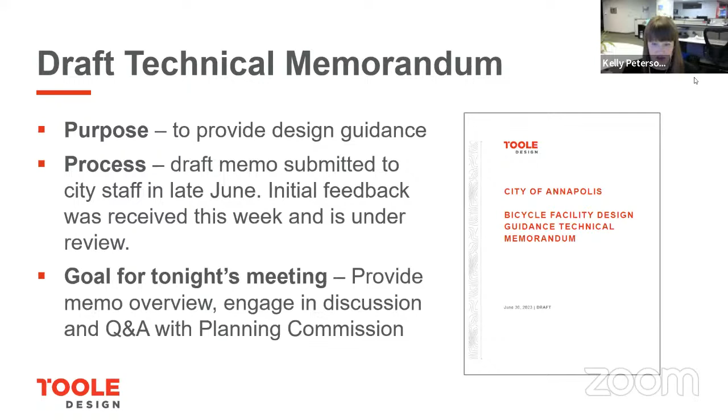So just a quick background on Toole Design. Our firm is a team of planners, engineers, and landscape architects focused on designing and building spaces where people can move freely and be a part of their community, not just move through it.

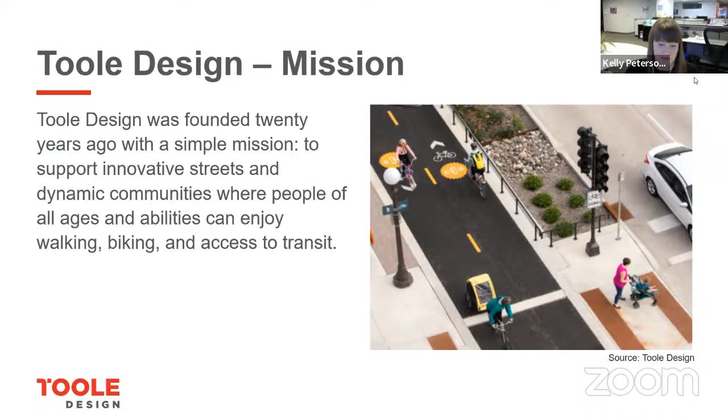Can I ask just a quick question on that? Sure. Is there a reason you don't reference any of the NACTO stuff? We have referenced it in the memo. We haven't worked directly on that, as far as I know. Okay, so you have worked—so these are things you've worked on directly, Toole Design worked on. Yeah, so these aren't. I'll get to the list of resources and references that we pulled from.

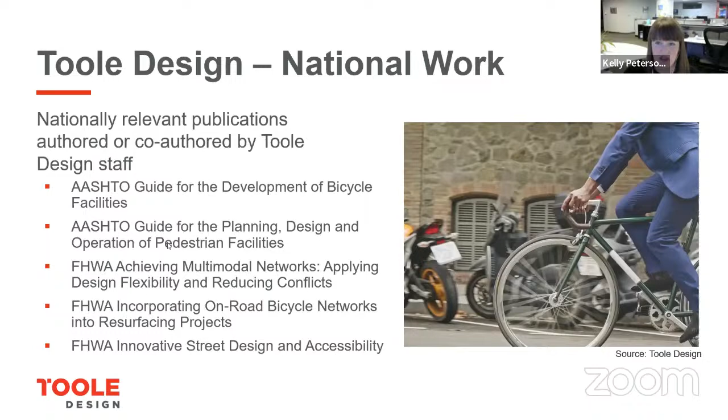But this is just an example of the national level of work that Toole Design is doing with pedestrian and bike planning. And then our work regionally, we've done a lot. These are just a couple example projects. Most recently, we've worked with the county on Walk and Roll Anne Arundel, which recommended 23 miles of separated bike lanes, 100 miles of new bike lanes throughout the county, and 200 miles of shared use paths. That project just wrapped up earlier this year, and it also made significant recommendations for Region 7, which includes Annapolis and some specific priority bike projects to help improve connectivity.

I won't get too far into this because I think Eric did a nice job of covering it. The planning context and purpose for doing this is really to give Annapolis design guidelines that reflect an evolving industry and best practices, and try to find more context-sensitive designs. Bicycle facility planning and network planning has shifted and evolved a lot over the last decade, so we're hoping to make sure we're always aligning our bike facilities with the appropriate user groups.

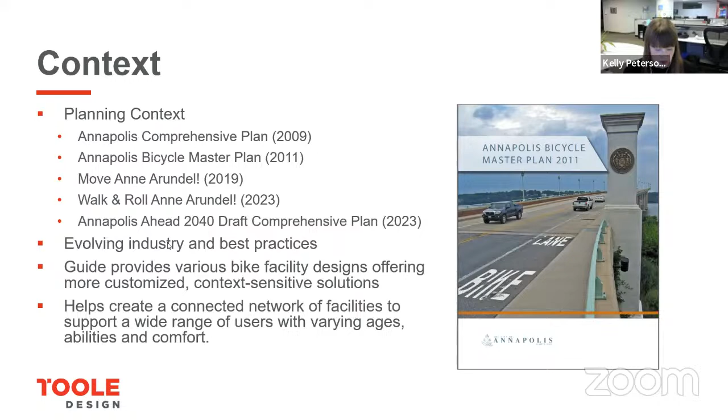One of our goals for this document is to help all of you set the stage for implementation and advance those projects so you can enhance your bike network throughout the city, whatever that may look like. So setting the stage for strategic investments that add value, setting the city up for funding opportunities such as MDOT Bikeways funding and a variety of other funding mechanisms to help inform when improvements will be implemented and how.

And there's a huge desire in any community to create more predictable outcomes, so streamlining decision-making between city departments and community stakeholders.

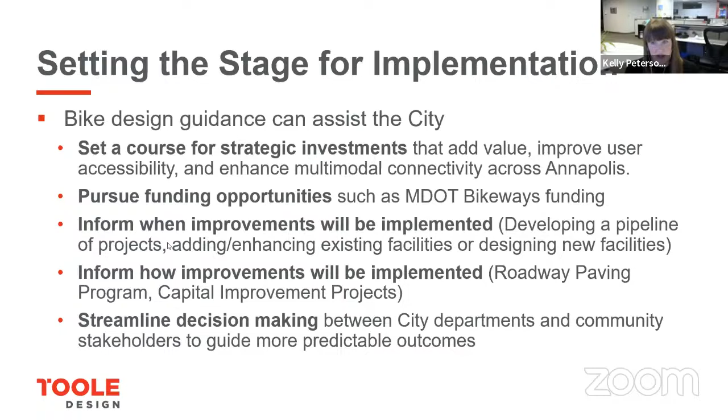I'll jump into a quick overview of the memorandum, which the title page is there on the right. One thing I wanted to acknowledge up front is that each bike facility project is really context specific, so we're providing a series of design guidance. There's a lot of local knowledge that you all have, that city staff has, from planners to engineers, and there's a lot of important information the community has about their neighborhoods and corridors. All of those things work together to help identify the appropriate bike facilities and design solutions. From this memo, it's not a one-size-fits-all kit of parts - not all design guidance will be applicable to every project.

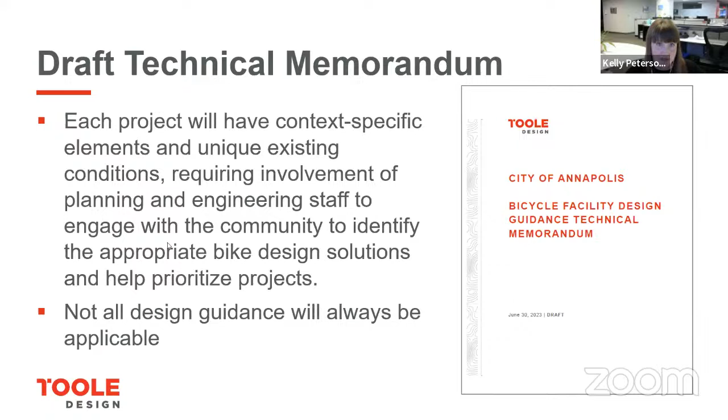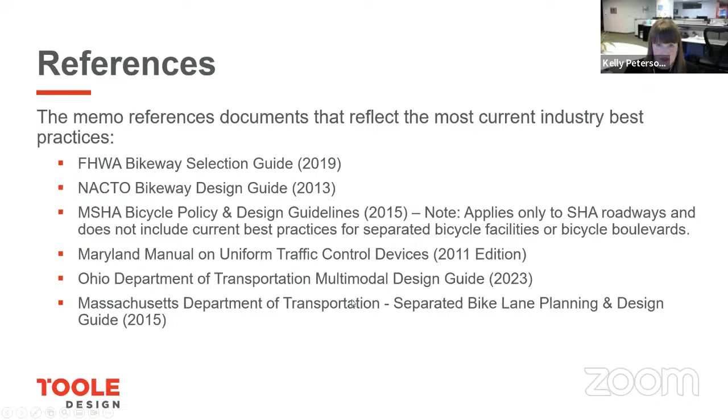Getting back to your question, here are some of the references we used. In our work, these are the most current, up-to-date industry best practices - as you'll see, they're mostly plus or minus in the last 5 to 7 years. There are some, including the Maryland MUTCD, that are only updated at larger intervals but have important information about wayfinding and signage. That's the list we pulled from, ranging from the NACTO bike guidelines to the FHWA bikeway selection guide, and we relied also on other states, including Massachusetts and Ohio, which have fairly recent industry best practices.

There's a couple planning considerations we want to think about as we're designing bikeways. First are our design principles. The top three are often the most prioritized and the key principles, which are safety, comfort, and connectivity, which don't require a huge amount of explanation, but do require a lot of thoughtfulness and design to accomplish.

The supporting design principles are directness - minimizing distances and trip times; cohesion - how the network works as a whole; attractiveness - making sure bike routes are attractive to cyclists, that they pass by interesting things and provide safety; and unbroken flow - reducing wait times, making sure crossings are safe, and ensuring a good flow for the cyclist on their journey.

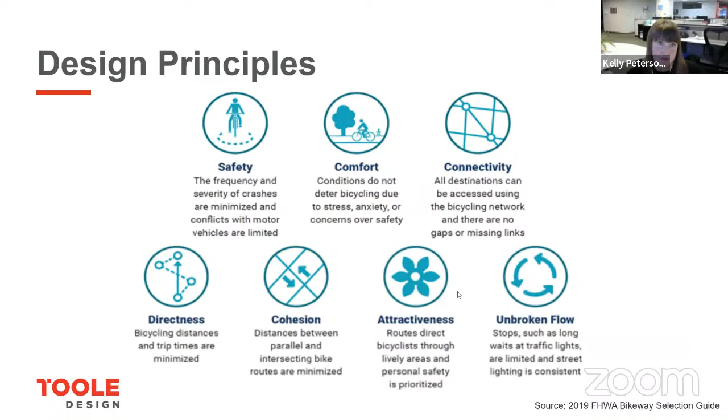Another planning consideration is the level of traffic stress. This is more of a technical analysis - I wanted to mention that MDOT has undertaken an effort to map all the roadways in the state for LTS. This analysis takes into account prevailing roadway speeds, the number of daily trips, the number of travel lanes for vehicles, the presence of bike facilities, and the location of the bike facility in the roadway. The rating score is from LTS 1, the lowest stress condition, to LTS 4, the most stressful condition. In this example chart, where we have lower traffic volumes and lower speeds shown in green, those are much more comfortable LTS 1 evaluations for cyclists, whereas with higher speeds, higher volumes, and higher numbers of lanes, we move into an LTS 4.

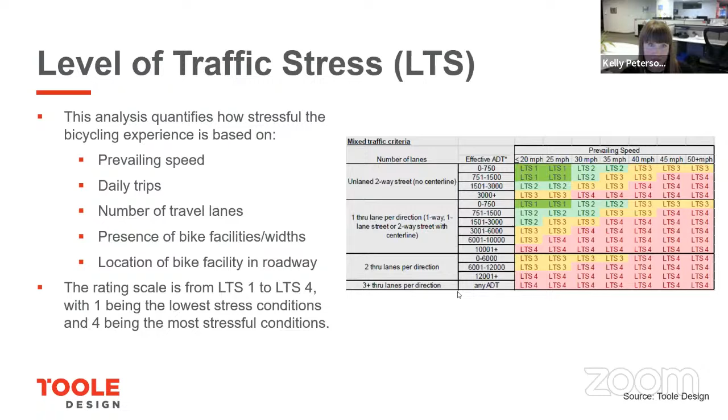I'll add that the LTS from Walk and Roll identified that most of the neighborhood and connecting roadways in Annapolis ranked as LTS 1 or 2, and most of the access roads in and out of Annapolis ranked as LTS 3 or 4, just for some reference there.

Another planning consideration is the types of users - you all might identify into one of these groups. These are generic groups for how people self-identify as cyclists, expressing the range of users' abilities, enthusiasm, confidence, and experience. So we've got 37% of people who don't ride a bike and have no plans to start. Approximately 51% are interested but concerned, meaning they're more likely to feel safe on separated paths and facilities with fewer crossings with vehicular traffic. Enthusiastic and confident are folks who might prefer a separated path but are comfortable riding on roads, assuming there's not a huge amount of traffic. And 7% are road warriors - strong and fearless, confident riders who are comfortable riding in most situations.

So I have a fifth category to add to this, and I brought this up a lot - I don't know how you would ever quantify it, but it's something we see here in Annapolis a lot, and in many urban places. I'm sure there's a better term, but basically people with no choice don't really fit into any of these groups. These four groups assume cycling is a choice, but we have a lot of residents whose only method of getting around is on a bike. Typically you see a person on an old mountain bike riding the wrong way or on the sidewalk. I don't have a number to put on it, but I wish there would be some way to capture that segment of non-choice riders.

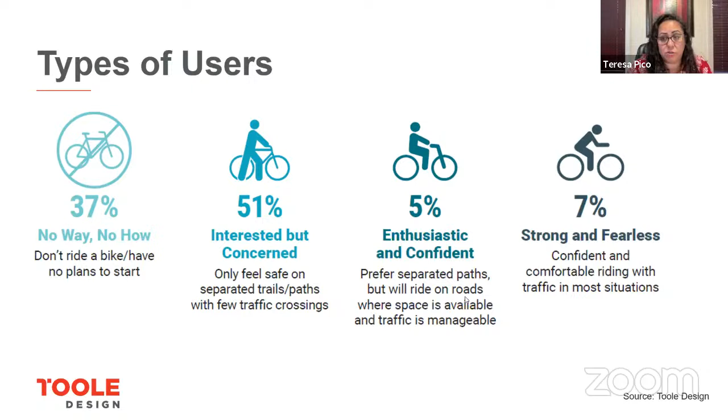Yeah, I mean, especially given the fiasco of our school bus service over the last year. Really bad. And your comment is spot on.

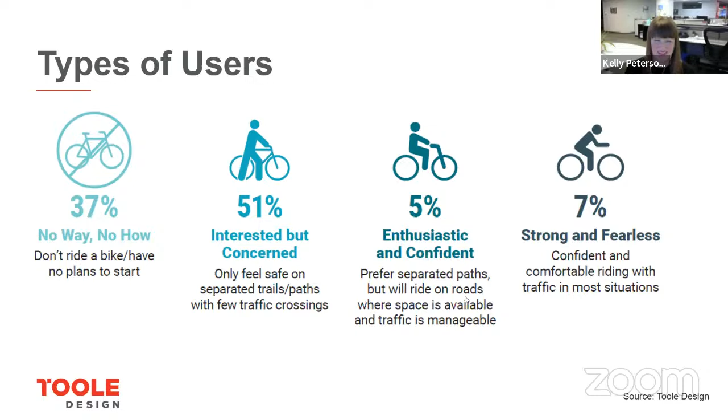A lot of younger people are not getting their driver's licenses as early and are relying on other types of transportation, or things like micromobility that also play into the types of facilities that we build - scooters, hoverboards, and all kinds of micromobility folks are using bike facilities generally.

Thank you all for that feedback. That's very helpful.

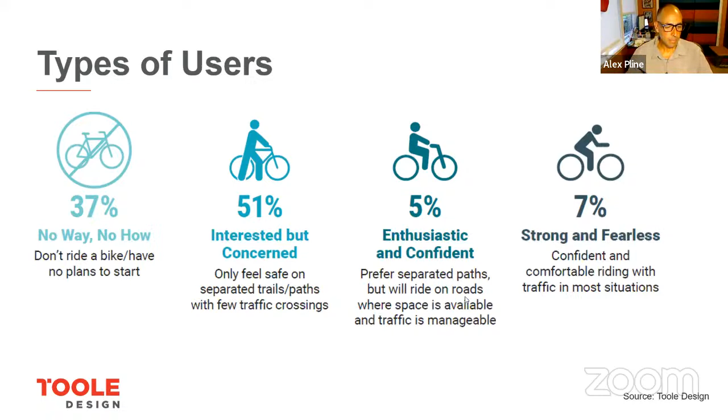And then the final planning consideration we looked at were really destinations and local considerations. So with Eric's help, we put together a spectrum of corridors in Annapolis, representing the different street typologies we could think about. This is obviously not all of them, but just a sample as we think about designing bike facilities and the different kinds of constraints - whether it's narrow right-of-ways, corridors with utilities right outside or alongside the right of way where we don't have a lot of wiggle room, or areas where we don't have curbs and don't have a lot of space, and we might need to modify some design recommendations to accommodate that.

Generally, Annapolis has an advantage in that it's primarily flat - the geography is fairly easy to navigate. But there are horizontal constraints with the right-of-way that a lot of other cities experience, especially with roads that have been built a long time ago. There's just not a lot of room to fit everything we want in there.

And then in terms of destinations, considering those as we design facilities - in the 2011 bike plan, some of the key destinations were outlined. Those included the Annapolis Mall, the Annapolis Arts District, City Dock, South Shore Trail, and Parole Town Center. So that's kind of the planning context as we think about bike facilities.

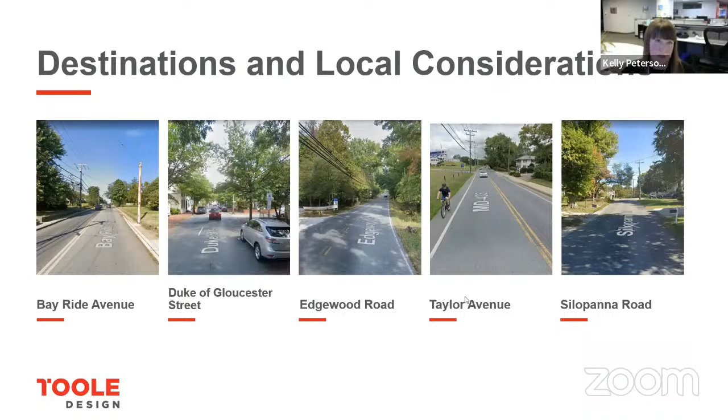And then to kind of advance our conversation about the users, how do we align our facilities and our users? How do we define the facilities, and then how do we align them with our users? So the 5 types of bike facilities that we focused on in this technical memo are shown here.

Starting on your left, we have a standard bike lane, here in Annapolis on Melvin Avenue, kind of our typical bike lane with the nice traffic calming that's been implemented on that corridor that is shown here. The second photo is of a buffered bike lane.

This is actually a photograph from Ann Arbor, a case study, where we have what we call a horizontal buffer, meaning it's painted, and then we have these vertical elements at the crosswalk. But as you can see, this is also a bit of a constrained corridor. There's no parking on it, and the bike lane there looks like it's about 4 feet, which is sort of the lowest width you want a bike lane to be, with about a 6-inch buffer. So even on constrained corridors, it's possible to make a buffered bike lane work.

An example of where that will show up soon, we hope, is on Skipper's Lane through Providence Point. There'll be a 10-foot travel lane, 2-foot buffer, and then I think a 5-foot bike lane. Pretty generous. Maybe the only one that would exist in the city at that point. That's a great point, Alex.

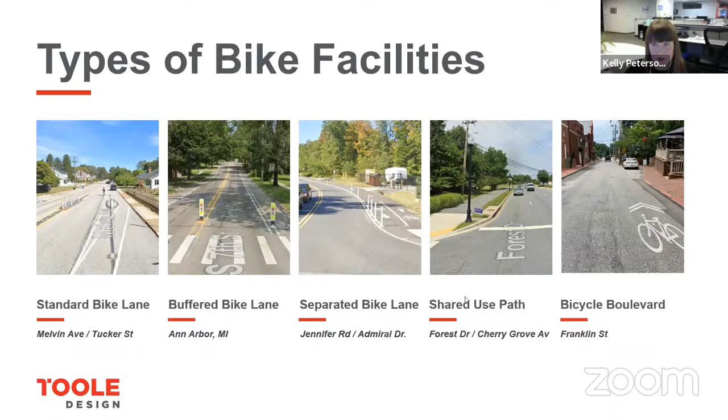And then the newly sharrowed bicycle boulevard as the final image on the right, which is on Franklin Street. And it sounds like those sharrows were just added quite recently. But this is providing the bicycle boulevard, providing more of a neighborhood facility. We'll get a little more into detail about each of these in the next section. But those are just some local references expressing the types of facilities we are looking at and providing design guidance on in the memo.

So this next slide really expresses a couple of different pieces about how we want to think about aligning our bike facilities and our users, which is a critical element of the success of any facility. It gets back to our key design principles of safety, comfort, and connectivity.

On the top of the diagram, we have the spectrum of users on the left, starting with a child linked on the back of their adult's bike. The scale of color there is starting from left to right, with green as the most separated type of facility, moving to the right to the least separated facility. So you can see the band of colors showing the most vulnerable users and those that we want to protect the most. And then underneath that, reflecting the types of facilities that are best suited. So a shared use path or a physically separated bike lane would be ideal for our most vulnerable users.

As we move into the yellow band, these are users that have some level of comfort on the road, but may still want some protection. So the facilities below them reflect the buffered bike lane, the on-street buffered bike lane, and the on-street standard bike lane. And then as we move down the spectrum into orange and red, we have our most experienced users who are most comfortable on the road. So the facilities there could be a shoulder bikeway or a shared roadway.

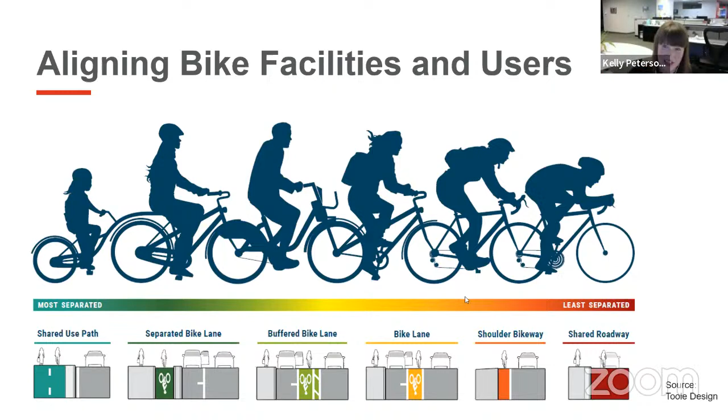And then we have the existing conditions context for identifying the preferred bike facility. As we talked about with level of traffic stress, the two key elements are volume and speed, which you see on the axes here.

There are additional factors we want to look at on any roadway or corridor, things like peak hour activity, rush hour restrictions, and the types of vehicles on the corridor. Oftentimes putting a bike lane on a freight route is not the best idea, depending on the type of facility.

We want to look at parking and curbside activities so that we can look at the potential for conflicts or how we might use design to reduce conflicts. And then the intersection of things that break up a bike facility or create interruptions, like driveways or intersections.

We also want to look at our vulnerable populations. We talked a little bit about that earlier, especially folks that may be using bikes out of necessity for transportation purposes and day-to-day activities and shopping because they need to.

On this graph, which comes from the FHWA Bikeway Selection Guide, you can see lower speeds and lower volumes express the facility that would be more of a shared lane or a bike boulevard at the neighborhood level. Midway up, you've got bike lanes, preferred buffer bike lane, kind of the middle of the road between volume and speed and some of these other elements.

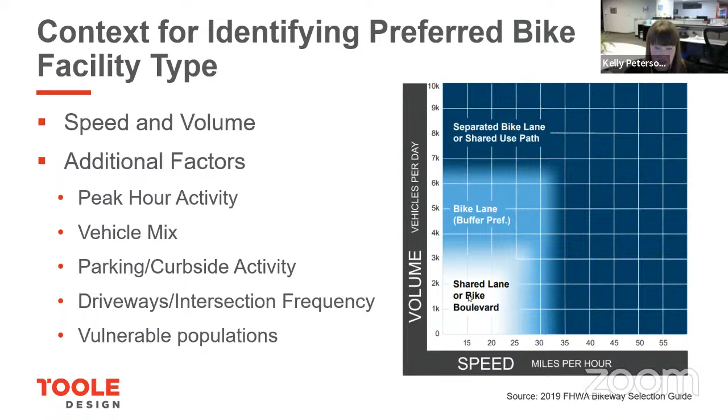Where you have very high speeds and very high vehicle volumes, you want a separated bike lane or a shared use path, ideally. Again, these are all kind of ideal conditions, but each facility will really be customized.

As we look at best practices, there's a couple of common threads when we evaluate feasibility for all facilities, regardless of which type we select. That's the space to build the facility, funding, maintenance, and then whether we implement it as a standalone project or integrate the design into a larger corridor or roadway project. Those are all factors that need to be looked at from the get-go.

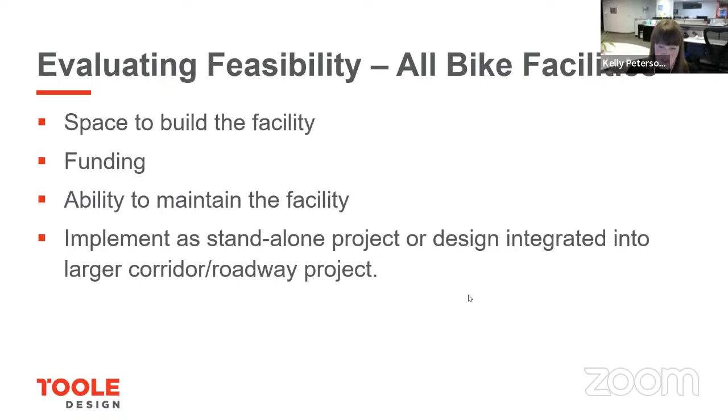There's key themes among all the different facilities, right? One-way versus two-way facilities, how much width those might potentially take up in the right-of-way, design features and materials, network connectivity, safety is obviously a critical one, access to destinations, looking at operation of intersections and how they intersect with the facilities. And then, like we just discussed, existing corridor activities.

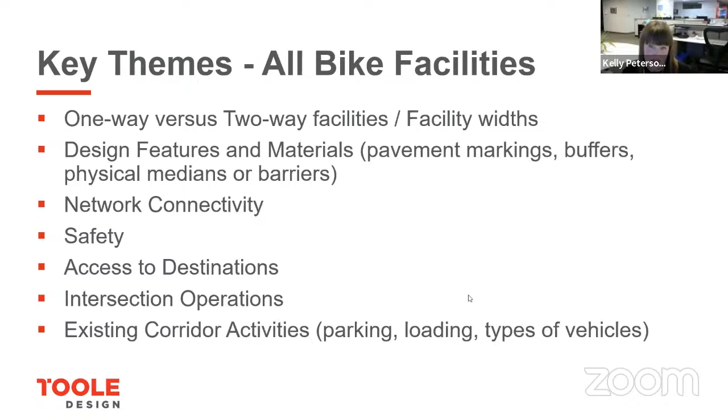So I'll go through each of the facilities just quickly. Again, we've got Melvin Avenue on the right there with a close-up. And it sounds like the traffic calming has now been hardened on this corridor.

Is that correct? Yeah, the pilot's over and they put the permanent solution in.

Terrific. So for on-road bike lanes, this is the sort of technical guidance that we're providing. We're looking at standard widths for a bike lane based on the conditions of where it's located, which is on the left side of the chart.

Generally with all bike facilities, and also with pedestrian facilities, there's a minimum width that we want. And then there's also a constrained width, which says, hey, if you don't have the real estate to put a minimum 5 foot wide bicycle lane in these conditions, the minimum can be 4.

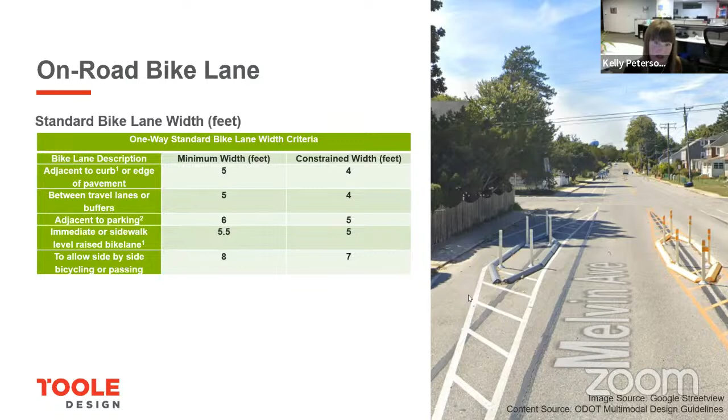That may be something that you all look at in terms of Annapolis, where there are some of those constraints, figuring out what the best design solution is and what kind of purchase you can get within the right of way to put in facilities. It may not always be a perfect 5 feet. It may not always be a perfect 4 feet, but making sure that you're trying to get as close to those as you can.

And then we've got separated bike facilities. The photo on your right shows a grade separated bike facility, actually in Minneapolis, but it shows for corridors where you do have the right of way, how you can really separate and dedicate public right of way to cyclists that are significantly protected and separated from traffic, providing another level of safety.

Typically, this type of facility really encourages those people that are on the user end of the spectrum who either don't bicycle or aren't super comfortable, but if there was a safer facility, they might consider bicycling. It tends to attract those people.

It also provides a safe facility for those that are comfortable cyclists, regardless of range. So again, our technical memo looks at peak bicyclist volumes, where the facility is located, and how many, if we have a one-way or a two-way bicycle lane, and then recommends some of the widths that the city can consider if they were prone to implement this type of facility.

I just want to add that even though these may be more expensive facilities, this is really the direction I think the city is going to go in the future, as we try to pull in more of that demographic that's very focused on safety and being separated from cars. In a lot of our most constrained corridors, like the Bay Ridge Avenue example that Toole has looked at, we can't take any more width from existing car lanes, but you might be adjacent to a shopping center with a significant setback, parking area, existing sidewalk, and vegetation buffer, so there may be an opportunity to utilize sidewalk area more strategically.

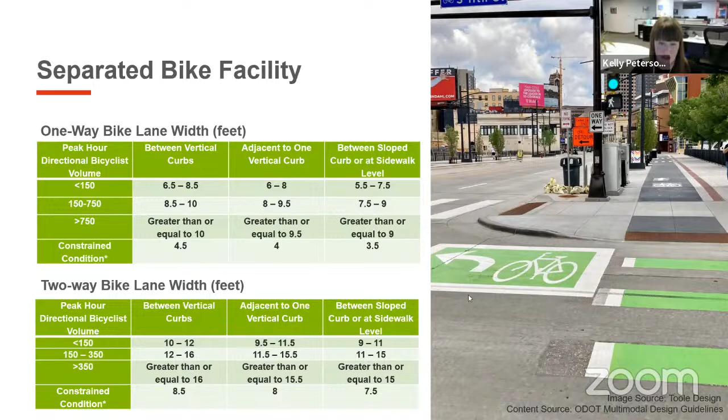Next up, we've got our bicycle boulevards. As I mentioned, those are really neighborhood focused, context-sensitive solutions that can be modified to the needs of the corridor, the users, and the neighbors. As you can see, there's a chart of motorized speeds and volume and peak hourly vehicle traffic. Preferred is 150 cars or less per hour, 1,000 or less per day, at an operating speed of 15 miles an hour. The max is 450 cars at peak hour with an operating speed of 25 miles per hour. So these are really focused on neighborhood bike facilities.

There's also a range of treatments that can comprise a bicycle boulevard, from low impact—like wayfinding signage, as you see in the photo on the right, giving people good, clear, concise directional wayfinding toward their destinations—to pavement markings, and physical improvements like intersection treatments, traffic calming, and higher impact traffic diversions. It doesn't have to be one or all of these things; it's really a menu of treatments depending on the outcome you're looking for. Bicycle boulevards are a customizable tool for neighborhoods, with mutual benefits for pedestrians, folks walking dogs, and walking with strollers. They tend to slow things down to a very community-oriented street in a positive way.

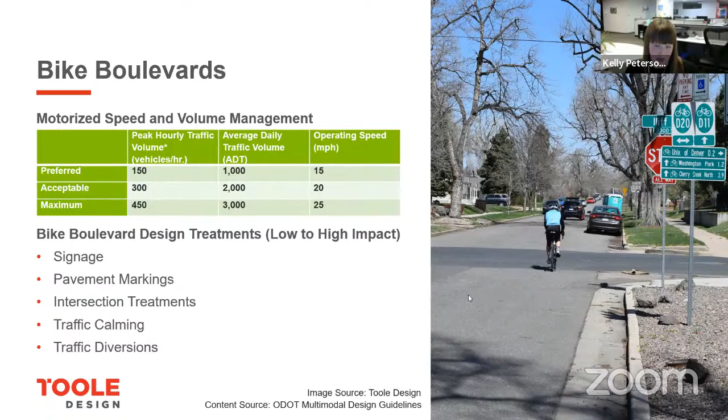Then, as we discussed before, we've got our buffered bike lane. Our design guide provides typical and proposed widths for buffers that you might locate adjacent to the street versus adjacent to parking versus adjacent to sidewalks, with context especially around a parking buffer—you typically don't want that to be 6 inches wide because you've got folks swinging their door open. You want enough purchase so everybody can cycle and drivers can exit their cars comfortably. So buffered bike lanes can use a variety of horizontal treatments to provide the buffer that's desired.

Yeah, that's the big problem with the bike lane on Melvin. Just a disclaimer, I live in West Annapolis, so I'm familiar with it. But that's the big problem with that bike lane—it's 4 feet, so it's virtually all in the door zone. I wouldn't ever recommend riding in it, because if somebody opens the door, you're going to hit it.

It's not, and the bike lane was really put there as a traffic calming methodology more than actually used as a bike lane. So the diagrams here are well taken. It's unfortunate you don't have the room on someplace like Melvin Avenue to have a buffer that keeps you out of the door zone.

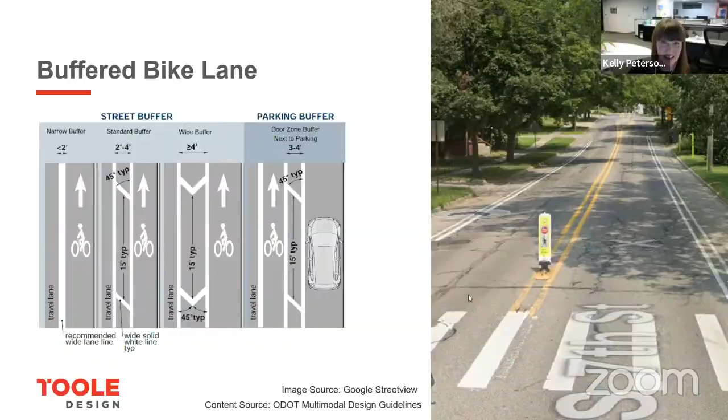The last section of our design guidance provides some basic information on wayfinding - the way people orient themselves as they go from place to place and navigate physical spaces. With regard to signage and wayfinding, the principles are pretty simple: keep it simple, be consistent, design for the casual user - someone visiting should be able to navigate using the wayfinding signage. Progressively disclose information as you go along the route.

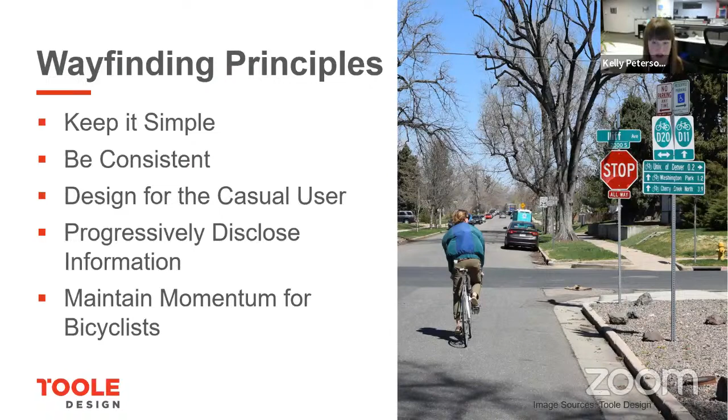And this one in particular for cyclists is maintain momentum. So especially in places that might have a little more elevation, we want to make sure you're not stopping the cyclist so they have to look at the sign and then jump back on their bike and restart all over again. So maintaining momentum for cyclists.

The four stages of wayfinding navigation comprise orientation, which is determining your location relative to the objects nearby and your ultimate destination. Decision making is the second stage, which is the selection of your route to the desired destination. Confirmation are all the visual cues and signs that let you know you're headed in the right direction. And then finally, destination recognition - being able to actually see and know that you're there.

The image on the right shows a couple of those different decision signs, and there's a variety of different design options that can be found in the Maryland MUTCD. So there's kind of a kit of parts in a variety of ways that a city can design a wayfinding system and confirmation signs and all the elements of the 4 stages of navigation that give you that information.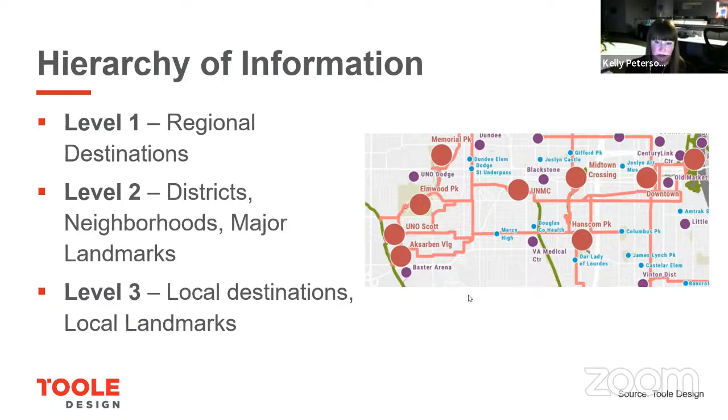So that's kind of the overview of the draft document and where we are now. I'd be happy to open it up for discussion or if there are questions. I'm going to stop sharing so I can see all of you.

So I have a couple of things that I apologize if they get too far down the weeds because I haven't read the draft, which I would certainly love to read through at some point. But just a couple things I wanted to get your sense on.

One's not necessarily related to bikes, although it can be relevant, and that's leading pedestrian signals. I know a lot of our stoplights in the city are old and may not be able to be programmed that way. But even in the newer ones, it's something you see very often in larger cities who have kept up with those practices.

For anybody who doesn't know what that is, basically it lets a pedestrian start to walk before any traffic in the same way goes. That way a pedestrian can get into the crosswalk and be visible to somebody maybe turning right, because if they both go at the same time, the car takes off and then there's a conflict point. That could be applicable to a bike on a sidewalk or a trail. So I hope you think about that.